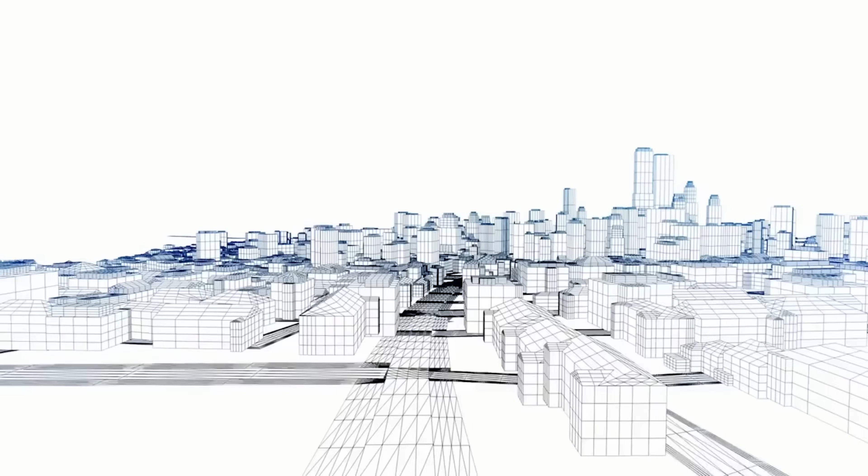I'm your host, Josh Porter, and today we're asking the question, and hopefully answering the question, what is a story? And no, we're not talking about children's tales or your favorite book, but we're actually talking about the stories in a building. And a lot of us think this is a ridiculous question. Why is he making a video on this? It seems so obvious.

Well, hopefully by the end of this video, you'll realize that it's not quite as obvious as you might think. And this raises some interesting questions that can have serious implications on how buildings are built, how they're maintained, how they're managed, and codes and ordinances and all that good stuff. And there are some new laws that have come out, particularly in Florida, but there are laws throughout the world that are based on the International Building Code that all really care specifically about this definition of what exactly is a story.

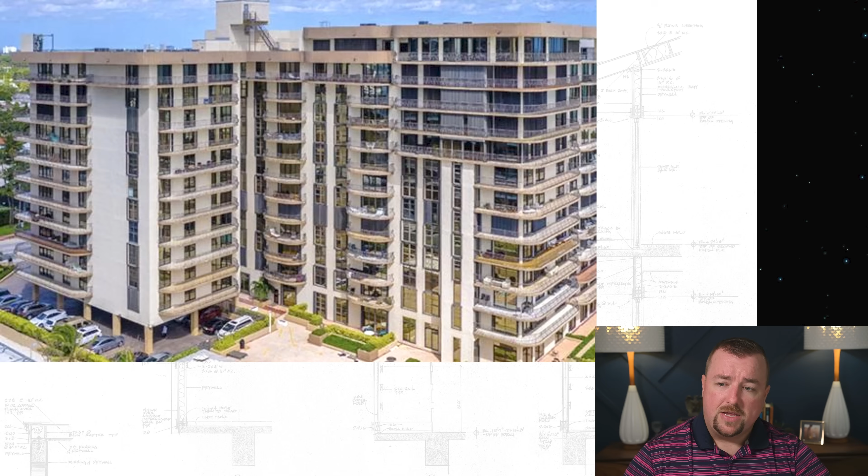And in this video, we're going to talk about the implications in two real world examples, and hopefully you guys can learn something from that with me here today. All right, so the first thing we're going to talk about is Champlain Towers South, and we're going to talk about this penthouse that was built on the top. So this area right here is the penthouse area that was built on top of the building.

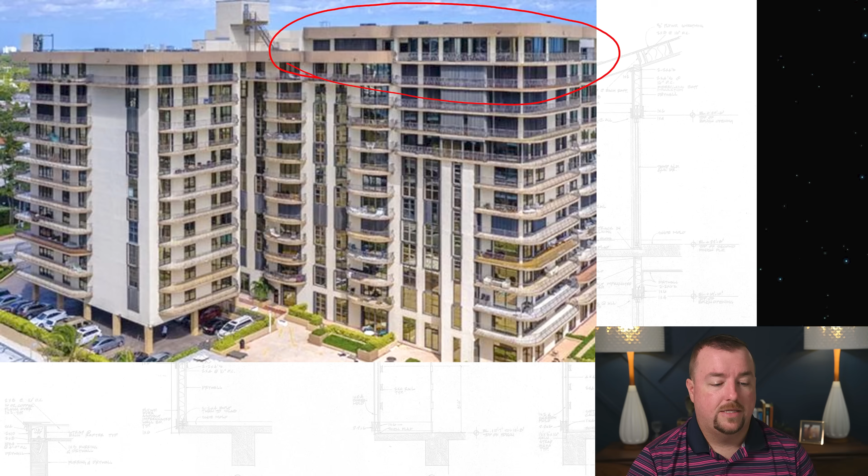Now, believe it or not, when this building was being constructed in 1980, the developer approached the town council and requested that a penthouse be put on top of the building. And there were members in the council that argued, no, we have a 12-story limit on our building. So this floor right here would have been the 12th floor, and they're saying if you put a penthouse above the 12th floor, you are essentially violating our town ordinances, right?

Our codes. And so the developer argued that, well, it's just a penthouse, it's not a whole floor, so therefore it falls into this gray area. Now, of course, there's accusations of a lot of colluding and money being exchanged back then between the town council and these developers. So who knows what the situation was, but there were enough that they went ahead and allowed the developer to put in this penthouse.

Now, this penthouse was added to the building. The engineer did add it, but the engineer really didn't change any of the structural design below the penthouse to handle the extra weight. And so this has been considered as one of the many contributing factors behind why this building collapsed.

So he got his 13th floor, which, let's just be real, and by the end of this video, hopefully I will have convinced you that this is indeed a 13th floor. He got his 13th floor, but this wasn't without some sort of opposition. So looking at a news article from the Herald in the early 80s, I think it was actually in 1980, they state, and I'll just quote you the interesting part here that I've highlighted.

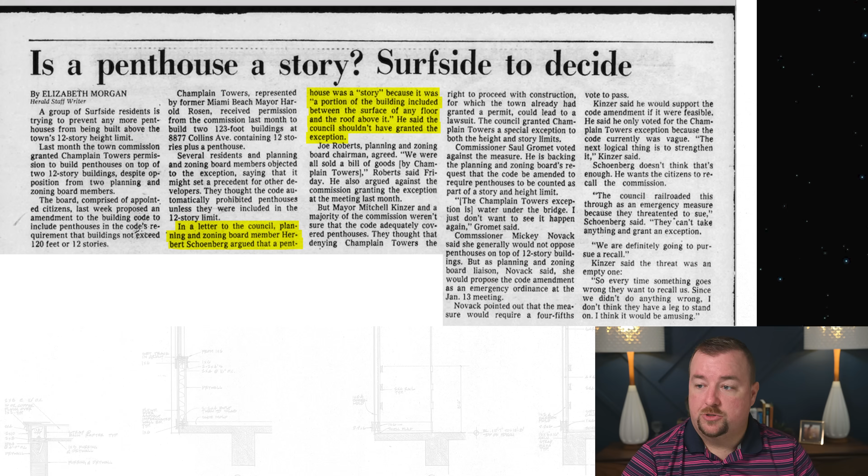All right, so we're going to get back to why is this a story or why is it not? But I just want to show you, this is sort of one of those things that comes up, and it matters in the real world how we define these things, because it questions, well, what are developers able to get away with? Now, keep in mind, the penthouse was the 13th floor, but it was the 13th floor above grade.

Now, inside, I should say, the International Building Code, they define a couple things. One of the interesting things is a threshold building. Now, there's lots of qualifiers for what a threshold building is, but the reason why it's called a threshold building is because it triggers a threshold in the building code, which requires engineers and architects to provide additional inspections and additional work on these buildings. And the International Building Code, and obviously for my Florida viewers, the Florida Building Code follows suit.

It states that buildings over 3 stories, in addition to several other possible criteria, but in this case we're talking about stories. So it says buildings over 3 stories are threshold buildings. Well, you can see why now this is kind of getting important, right? Because what if a building is 4 stories, or it can be argued that it's 3 stories and it's kind of in that gray area? Well, do I need to comply with the codes of threshold buildings or not?

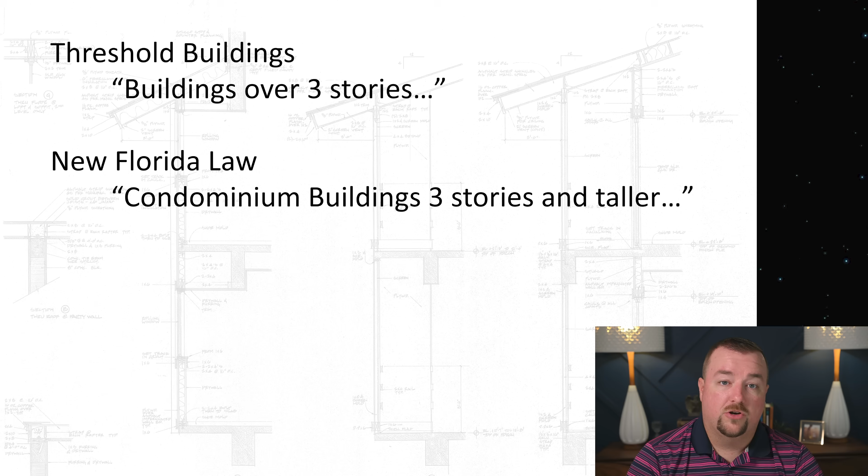In Florida, we actually passed some new laws recently, which I've covered in previous videos. And in the new law, they state that condominium buildings 3 stories and taller must, so on and so forth. So the real world example that we're going to go through in this video is an actual client of mine. It's an actual case that we dealt with, and the question was actually put to us: do we have to comply with this new law for condominium buildings 3 stories and taller? In other words, they're asking us, is our building 3 stories or taller? And you'll see it can be quite confusing.

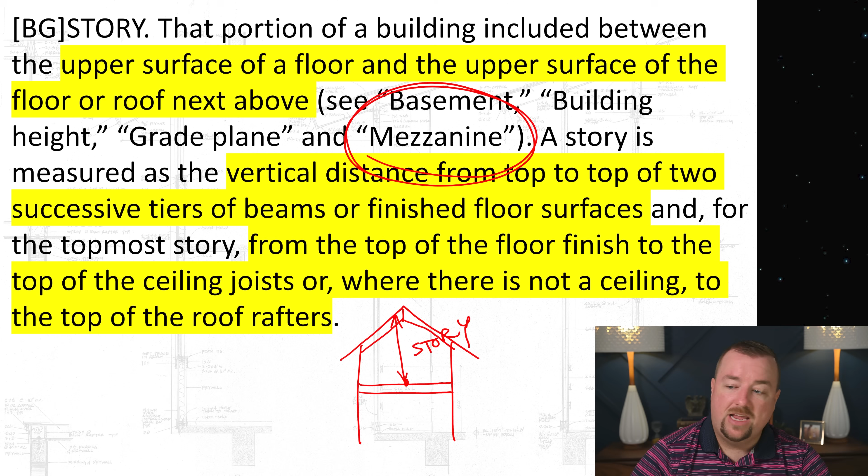So far, so clear. These are easy, low-hanging fruit for us to understand and digest very simply. But I just wanted to show you the International Building Code, how they define these things. Now, if you come up here, you'll notice the word mezzanine. It says that a portion of a building included between the upper surface of a floor and the upper surface of the floor or roof next above, but then it says in parentheses, see basement, building height, grade plane, and mezzanine, because all these other definitions really matter. In particular for this video, what matters is the definition of mezzanine.

All right, and so I'm just gonna give it to you real quick, but we're gonna return back to this to break it down. Basically the definition of a mezzanine is an intermediate level or levels between the floor and ceiling of any story, and in accordance with other parts of the code. All right, now,

Then the International Building Code goes on and defines what a story above grade plane is. And this is going to matter. Remember, early in this video I talked about the basement level of the Champlain Tower South, for example, but the basement, or a parking garage of any structure, is it considered a story when we're talking about these codes and ordinances? Well, in this case, they give you what is the story above the grade plane. So they're trying to define for you what is the first story of a building, in other words. And it says any story having its finished floor surface entirely above grade plane, or in which the finished surface of the floor next above is.

So up to this point, it's still not really defining. It's just using circular phrasing where it says surface entirely above grade plane. Okay, like help me define that, right? So it does. It goes on to help you define it. There are two conditions. One, the floor must be more than 6 feet or 1.8 meters above the grade plane. Okay. And then I'll show you where that grade plane gets measured at.

Two, it needs to be more than 12 feet above the finished ground level at any point. And that's very distinct. So they're distinguishing between grade plane and at any point. And there's different units of measurement that matter for that. One is 6 feet and the other one is 12 feet. Okay. And so we'll apply that. But let's go back and look.

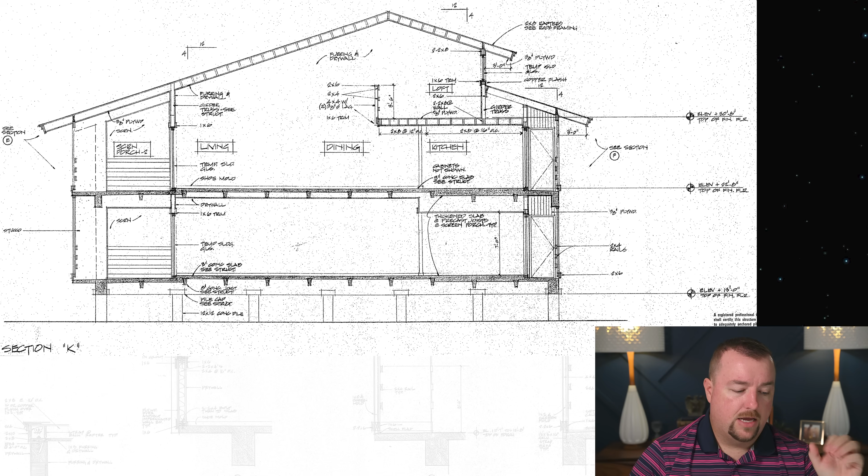Let's start talking about this real world example I've been talking about. This is actually one of my clients' buildings. This is a cross-section view, like a slice through an apple, looking through the building. And you can see that you've clearly got a floor here. I shouldn't say floor. Let's use proper terms for this, I don't want to use loose terms. So we have a story here. That's pretty obvious. We have, let's say, a door here going in.

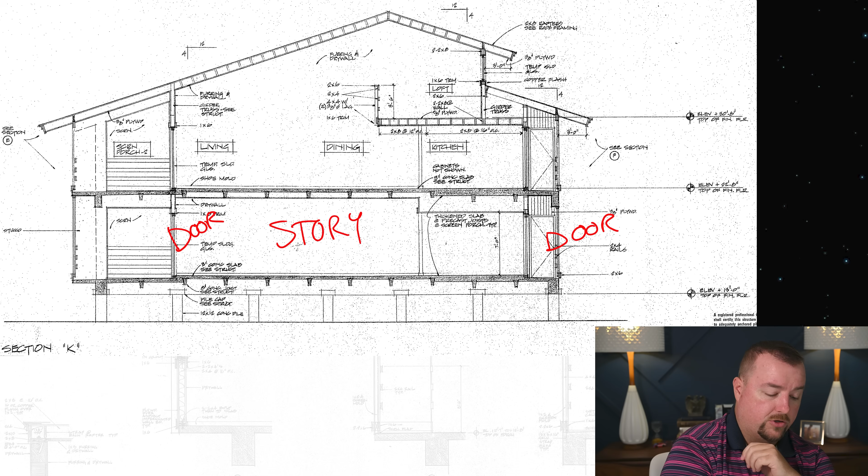You know, here's our floor, and here's the floor above it. So remember, we measure from floor to floor, and you end up with a story from the top of the floor to the top of the floor. So we know we've got at least one story in this building. So the question is, I've got this floor and I've got a ceiling here.

And I've also got a floor here, though, at this area where they call a loft. So here we've got a floor. And now I am using proper terminology: it's the top of the floor surface where you could stand. Okay, so there are stairs. You don't see the stairs in this picture, but there are stairs that go up to this area that they are defining as a loft.

All right. Now, this is a term that's used in development and architecture, but really what it actually is, technically, is a mezzanine. And that's why I wanted to show you that definition of what a mezzanine was before. So the client essentially had this, and then here you have this building built on stilts, and the grade is presumably somewhere. Okay, grade is somewhere. As far as our conversation in this video is concerned, we don't know where the grade is.

So the question is, do I have a story here? Do I have a story here? And I'm putting question marks on these. And then do I have a story here? And so because these are questions, you can analyze this building. You can say, well, this could be a 4-story building, it could be a 3-story building, or it could be a 2-story building. Now you're kind of getting the idea. Do the people who own these buildings and live in these buildings need to comply with these new laws and these new codes? So they really need to understand, how many stories is my building?

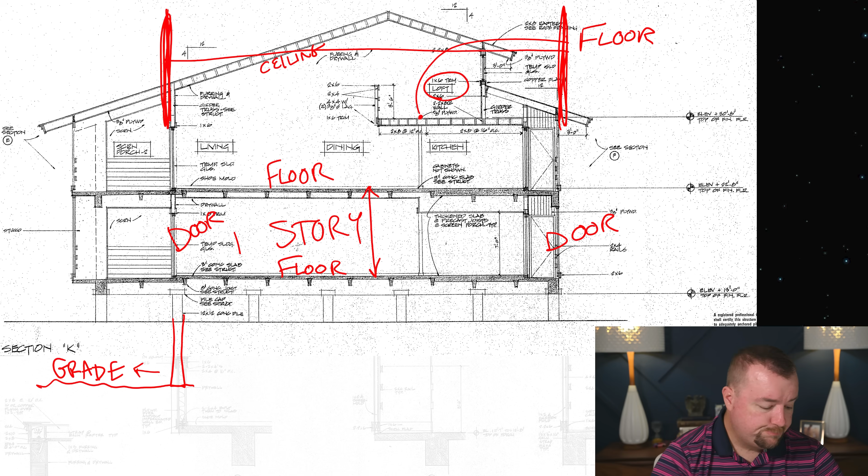So if we're going to measure the width of the building here, then the grade plane is anything outside of that envelope. So if this wall plane and this column were to be taken down here, the grade is to the left of this on this picture. And this over here is not grade plane. It's under the building, so it's not considered under the International Building Code definitions as being part of the grade plane, okay? And then you would have a column here, and you would have grade. Now, the reason why this is important is because everything inside the envelope of the building could be lower, which in the case of our client, it was, okay?

So the question then comes in, okay, so I have two items. If you remember our definition, we had the 6 feet and we had the 12 feet, right? So 6 feet above grade plane or more than 12 feet above any other point, then we have to call it a story. So in this case, our client had an elevation outside of, let's say, 3 feet, or a little less than 1 meter, okay? So they did not meet definition 1, where the first finished floor was more than 6 feet above the grade plane.

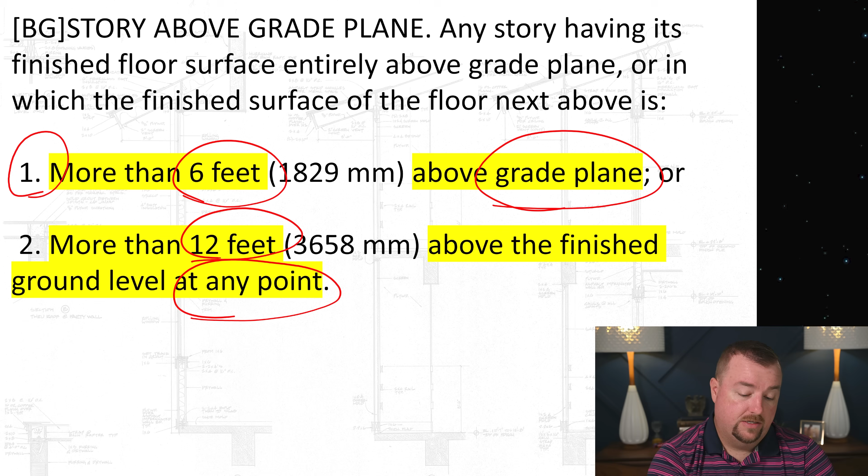So then you trigger the second question. Well, is any point around or under this building more than 12 feet above the finished ground level at any point, right? So the question was, is this dimension here more than 12 feet? And it turned out it was approximately, let's say, 5 or 6 feet here. So it did not meet the second definition of a story above grade plane.

So because it didn't meet either definition, then technically from this first floor here all the way down to the grade plane, it was not a story. So this area here, I'll just write it real quick, is not a story.

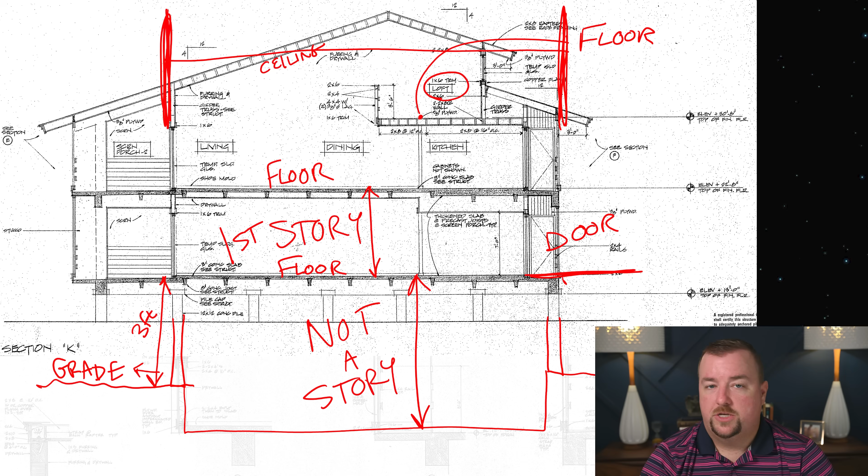From here to here. Okay, it doesn't matter if you measure it from out of the grade plane or if you measure it where I just showed that dimension there, right under the building. It doesn't matter. It's not a story. So that means that this area here is the first story. All right, are we following? Because we're going to build from the ground up and answer these questions.

Now this drawing is getting a little messy, and we want to now look at this mezzanine issue. So I'm going to give us a clean sheet here and zoom in a bit, and we're going to look at the question of this loft/mezzanine. Now we know that this is the first story. We just determined that. Okay, and we know that there's at least a second story in here. So the question is, are there 3 stories? Is there a second story here and this is a third story? Or is it just a second story with a mezzanine?

So what we want to do is go back to the definition of a mezzanine. We want to dissect the definition of a mezzanine. And every word is important, especially when you're dealing with law or code or anything like that. All right, so a mezzanine is an intermediate level. Notice they didn't call it a story. Level or levels between the floor and ceiling. Now remember, the floor and ceiling by its nature is already the definition of a story, the space between a floor and a ceiling. Or floor to floor, right? Or if it's the top floor, it's the floor to ceiling.

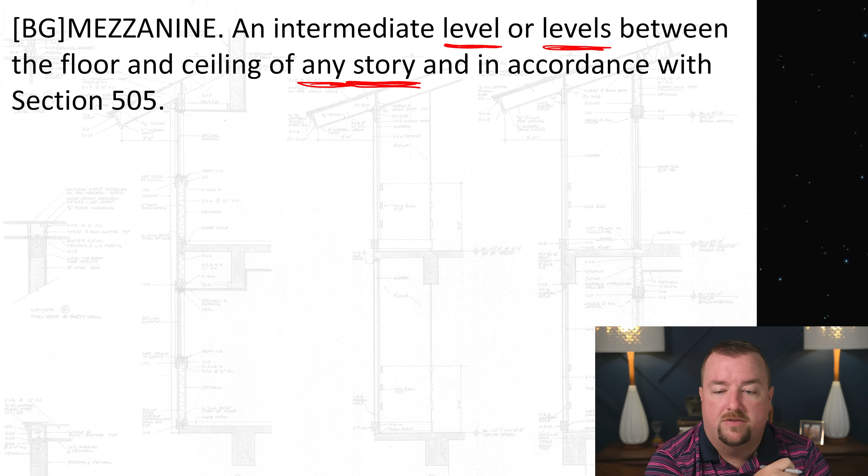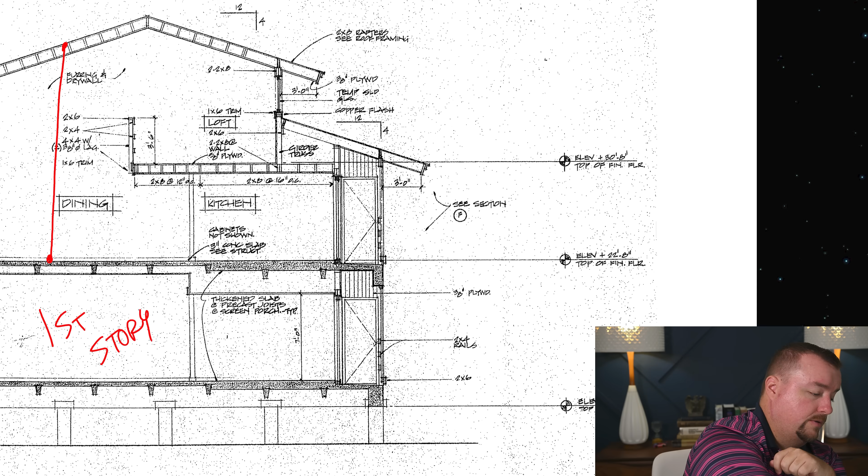So an intermediate level or levels between the floor and ceiling of any story. And it uses any story, not stories. It's a singular word, and in accordance with, again, Section 505, which is another part of the code. Doesn't matter for this video. So again, a mezzanine is an intermediate level, not itself a story, between the floor and ceiling of any story. So let's go back to our zoomed in picture. We know for sure that the top of this floor to the top of the roof is a story. And based on that definition, this area here being a mezzanine, we know that the mezzanine is simply an intermediate level contained within a singular story.

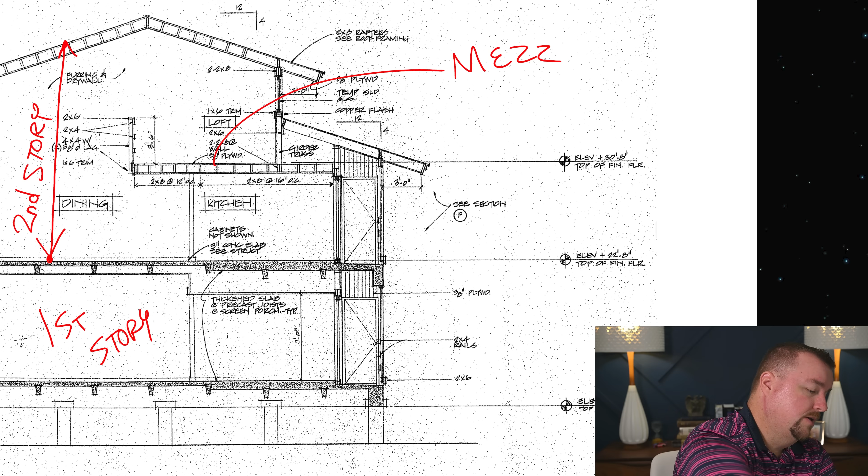So in fact, when we analyzed this particular building for this particular client, we did not count the mezzanine, that loft area, as a third floor, but instead we considered it an intermediate level contained within the second story. So we ended up returning to this particular client and telling them, hey, your building does not need to meet these new reporting requirements that are in the new statute. And it's not a threshold building. It's technically considered a two-story building.

And where this is going to have even more implications further down the road, which I wish I had talked about earlier in the video, but if you've stuck along this long, you probably already put it together in your mind, is that the insurance rates you pay as a condominium are going to be greatly affected by how many stories your building is. It's already kind of affected by that, but now you have new laws and ordinances, and insurance companies have to cover any upgrades related to laws and ordinances.

So for example, if there was a law passed that said, hey, if your building is 3 stories or taller and you took a little bit of damage from a hurricane, the whole building needs to be brought up to code, that insurance policy is going to cost you a lot more than if you were only a 2-story building and didn't have to be fully brought up to code for a little bit of damage. You see how that works? Well, hopefully you guys learned something in this video.